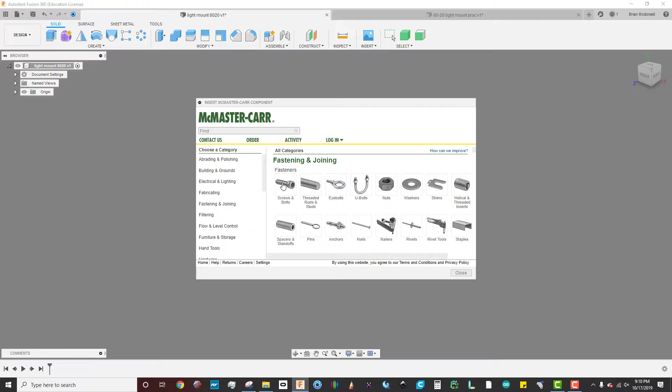Hey makers, welcome back. I just wanted to put together a quick tutorial about a light mount that I created for my 3D printer.

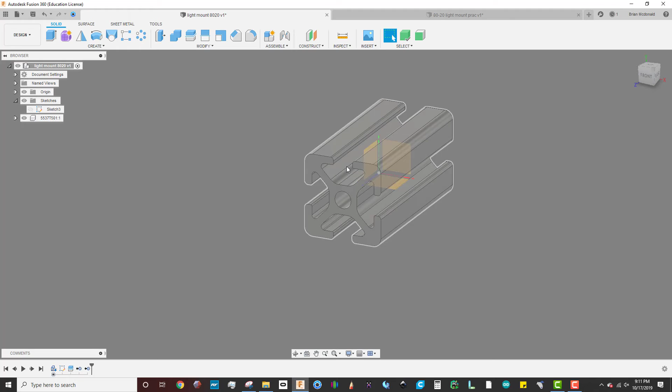So this is the modeling process I want to take you through. Right now I'm just cutting away material that I don't need. I grabbed this 80/20 rail from McMaster-Carr. It's a 20mm rail. It's what I measured from all the 3D printer rails that I have.

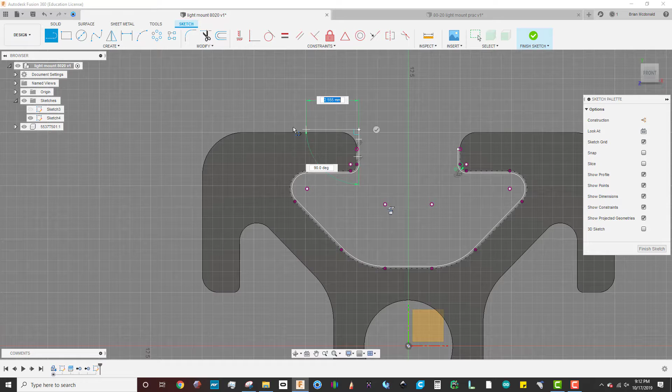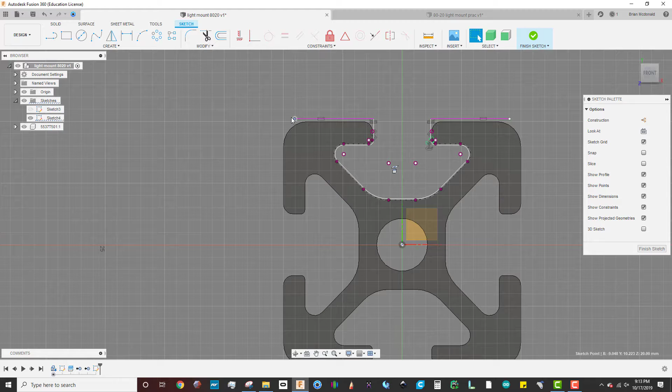So at the moment you see me copying the profile of the 80/20 extrusion just to get a starting point for the sketch. The idea here is that I'm going to create a positive extrusion to slide into this 80/20 rail that's going to serve as the connector for the actual light mount itself.

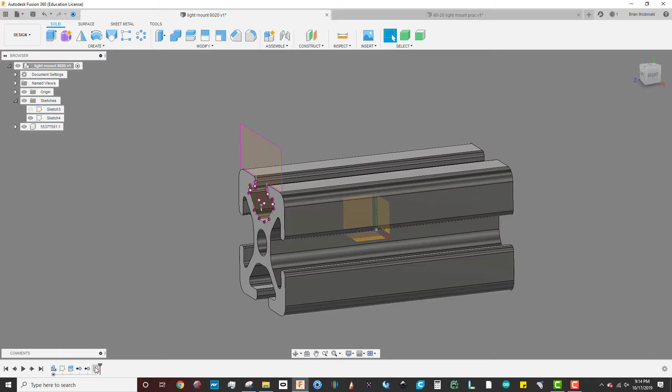And now that I have a closed sketch, I can add some dimensions just to get a starting point. Kind of change that plane so I can do a midpoint extrusion, keep things symmetrical.

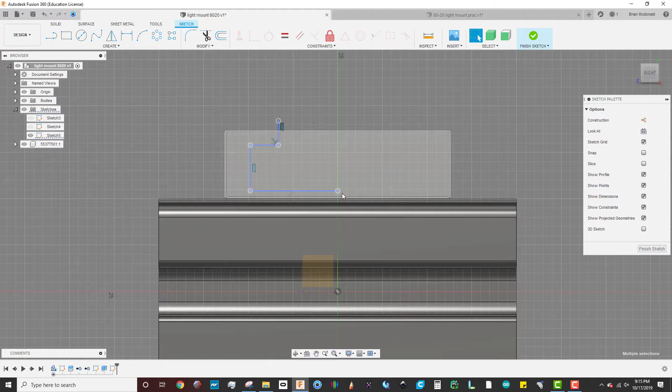So right now this is the sketch to cut out the slot to mount the actual light. And again, trying to work with symmetry. It's always easier to do things once and have them copied for you. So just throwing on some quick dimensions.

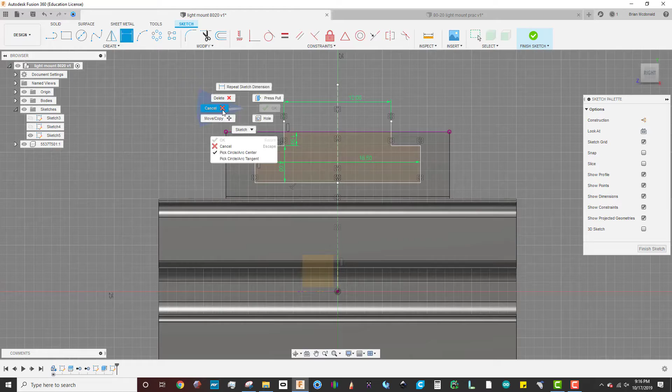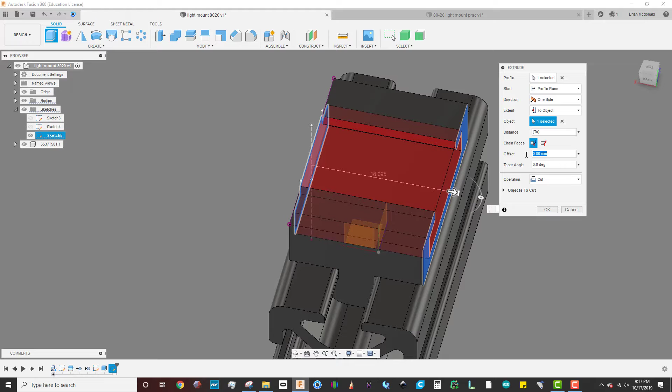So I don't want that extrusion to cut all the way through. I want a back wall to help support the mount that's on the end of the light. So that's the basic shape of the slot.

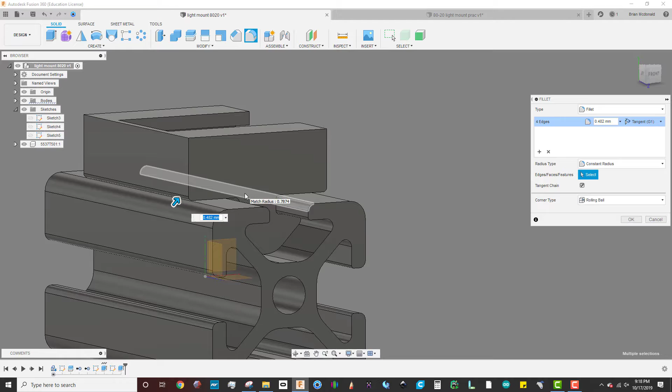Now I'm adding fillets both for aesthetic reasons and structural. Fillets add material. The more material I have, the stronger the part's going to be. The light doesn't weigh very much, but this part is very small, and it's made of PLA, which tends to be brittle. Later on, I may print in PETG, but for now, PLA will do.

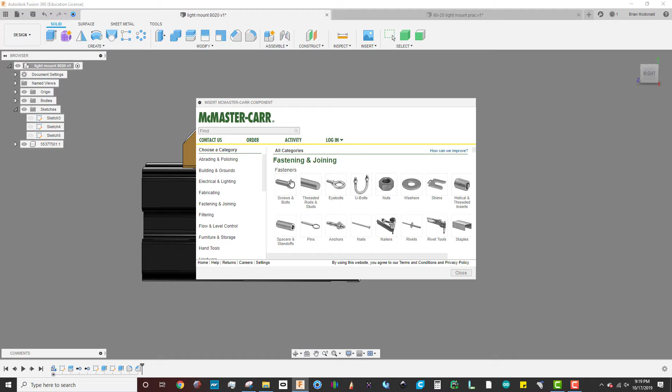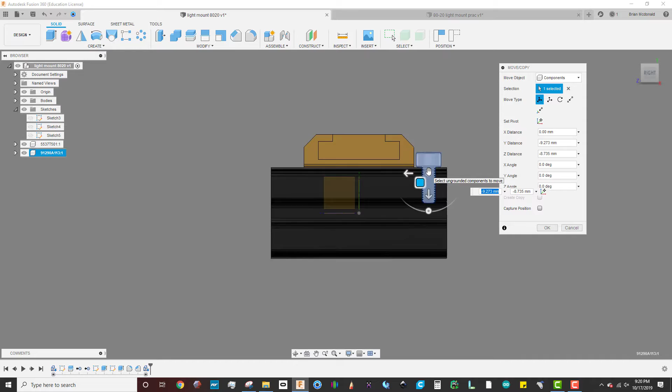So I'm going back out to McMaster-Carr to grab a metric screw. This connection that McMaster has with Fusion 360 is nice. Just go grab models and import them in directly. So I'm just positioning the fastener.

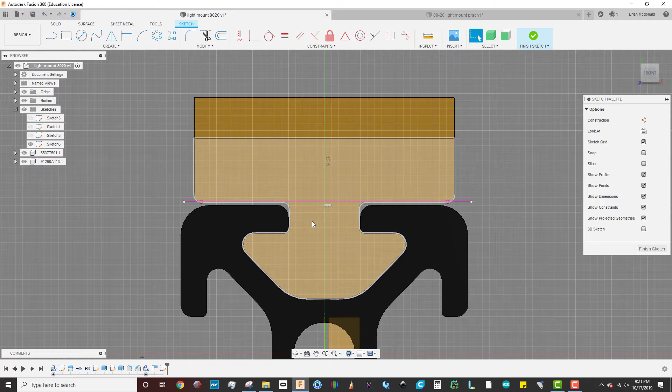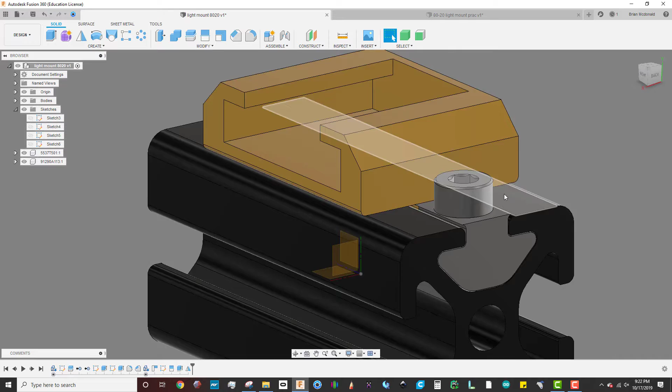So what I'm doing here is splitting the part so that I can extend just that body. That would be the body that supports the fastener. So just use that fastener to cut a hole in that body. Just do a quick subtraction, cut, keep.

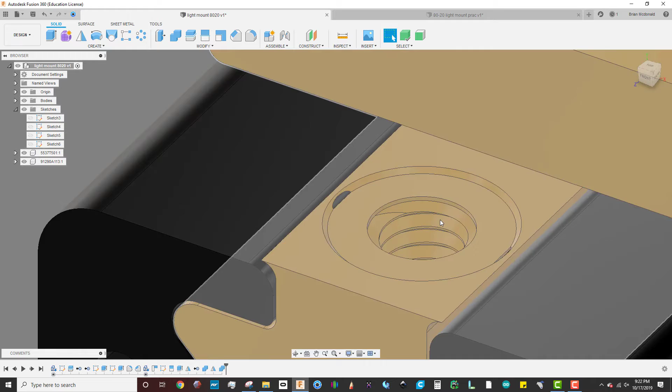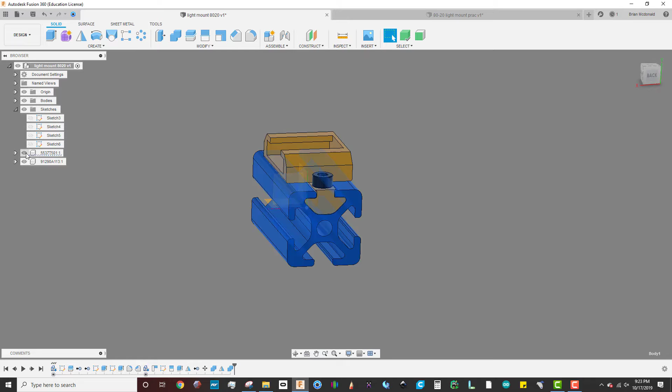Then I mirrored the body and I noticed I had this tiny hole there. So I'll just go back in time a little bit. Adjust the height of the fastener. And there we go. That's the finished product. Make a few final adjustments to the chamfers.

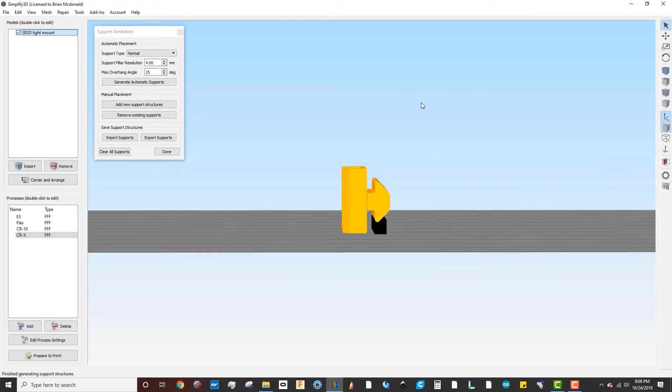So let's jump into Simplify 3D real quick. So we'll drop in our STL file and we'll place it appropriately. In that orientation, you should have strength exactly where I want it, to make sure we have a nice strong joint between the slot and the part that goes into the 80/20. So right now I'm adding manual supports because Simplify 3D for some reason doesn't think that area needs supports. I disagree.

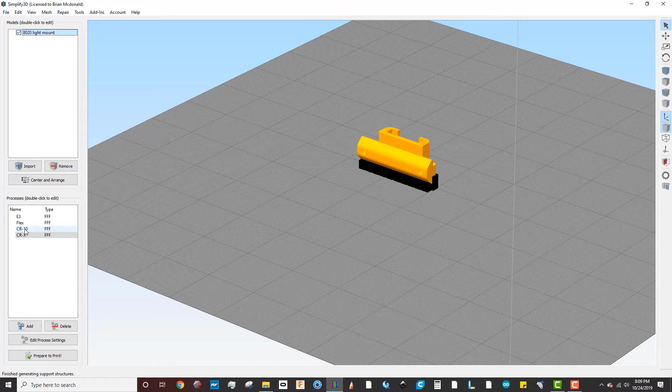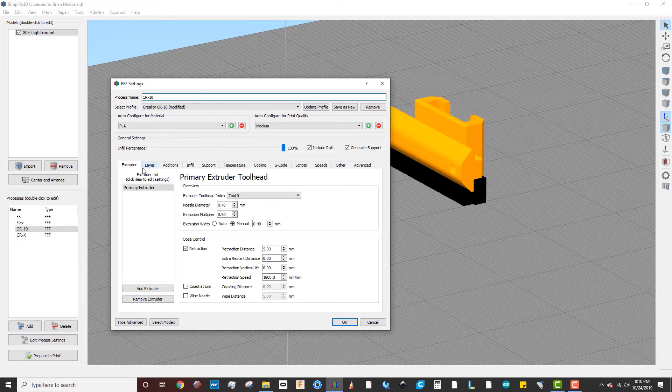So just going through and clicking through the surfaces I need to have support. And I'm doing this because this area needs to be rather precise. There's not a lot of room inside of the 80/20 slot.

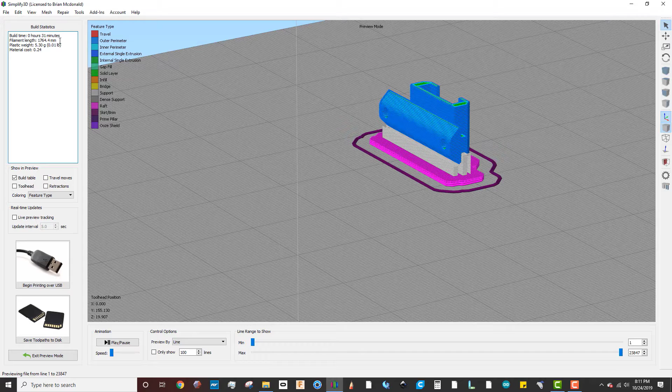What's nice about my CR10 is I have it plugged into my computer directly, so I can control it from the desktop. So right here, all I'm doing is heating up the bed and the nozzle. I'll go over to the printer just to have a visual check to make sure things are heating up, and they are.

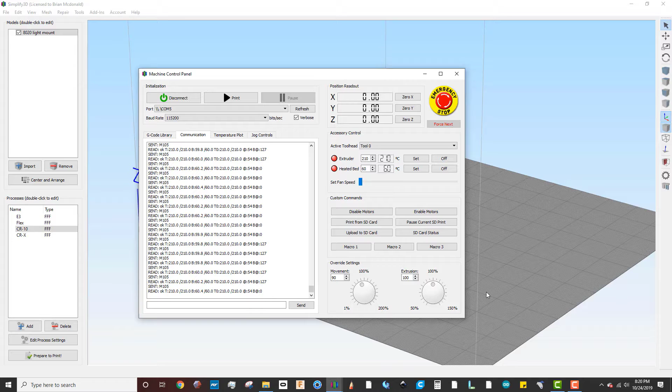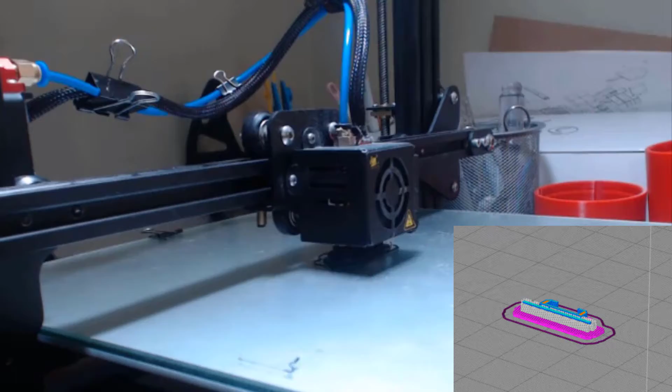So it looks like things are heated up nice and warm. Should be ready to go here. Going to go ahead and start the print. And we'll just watch it go. Looks like we're just about done here. Took about 1 hour.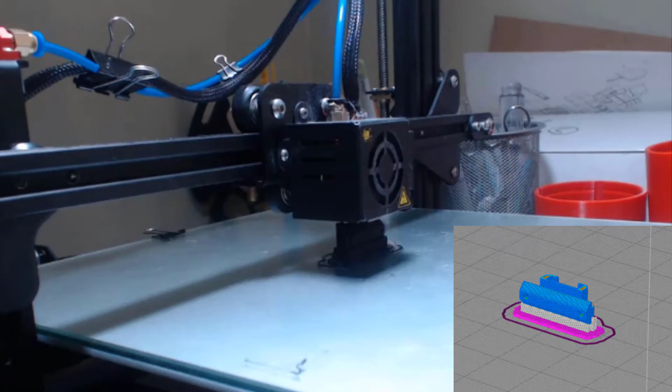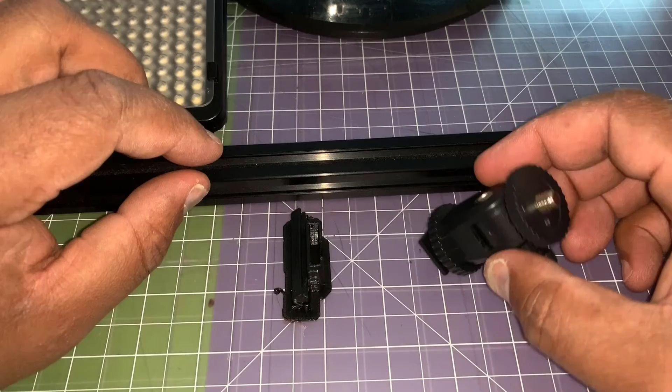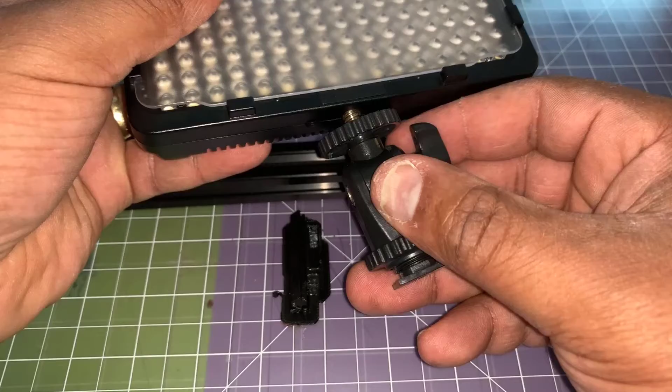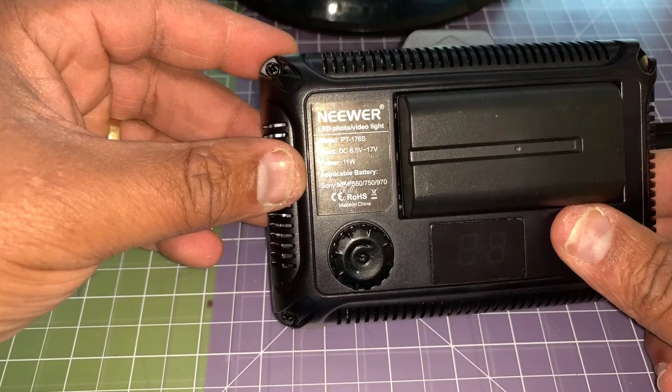Okay, so the whole idea behind this print was to create a mount for the 80/20 rail. This connector that came with my Neewer light mounts right here, and the other end will mount to a tripod. Once again, this is the Neewer LED photo video light. You can get these from Amazon. They're pretty inexpensive.

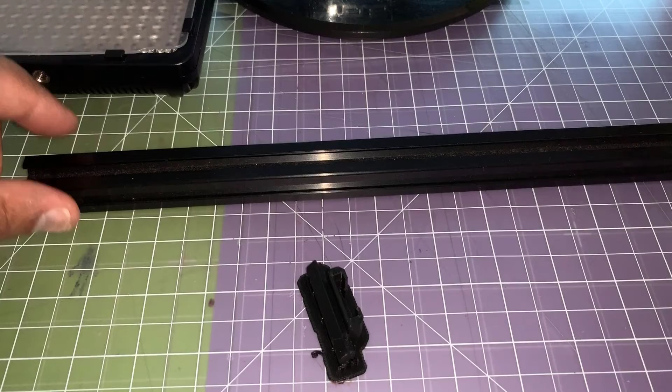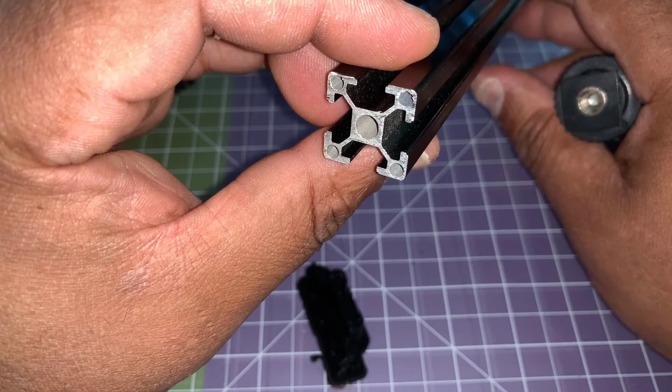But the idea here is that I wanted to put this on my 3D printer, and all of my 3D printers are constructed of this 80/20 extrusion. That comes through clearly, but there's the profile that's just extruded for X amount of length. So I wanted to adapt this to fit onto here. So I modeled something approximate, and I'm going to attempt to fit it on.

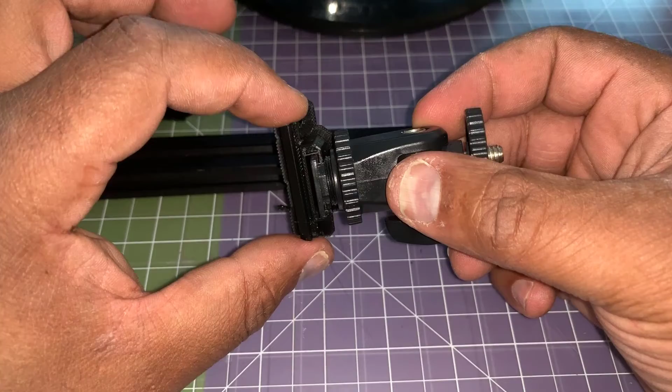So you can see I haven't even peeled off the support material. I'm just testing the fit of this slot, and it seems to fit just fine. It's pretty snug. Probably don't even have to... yank it on it pretty hard there. It won't come off. But just for added security, this will tighten down on top of it.

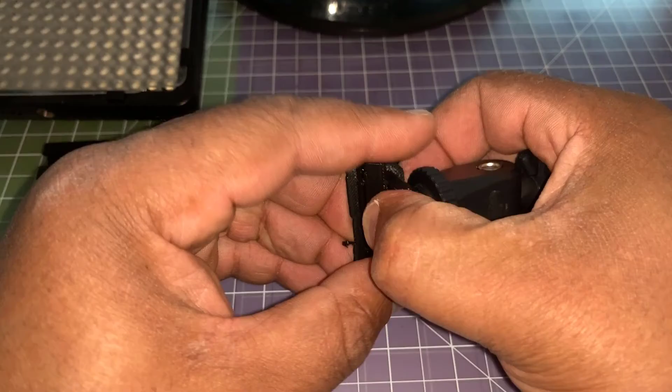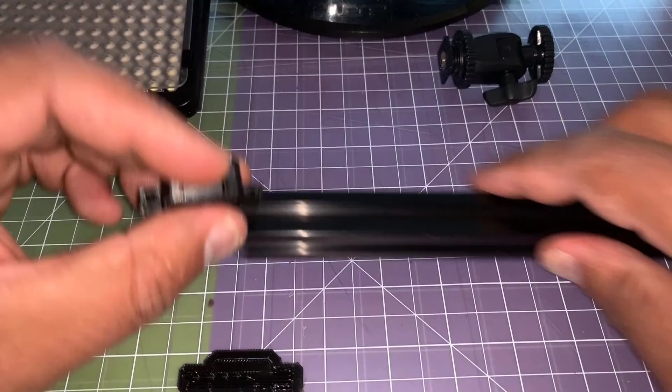So let's peel off the support material and see if this will fit on the 80/20. So as you can see, there's the end profile that we modeled. And what's really important is the slots in between here. So let's attempt to slide it on. Try to remain in frame here. All right, it's giving me some trouble.

So it fits, but it's pretty snug, and I'm not going to be able to slide it exactly where I want it to go. So what I'm going to do is hit it with the Dremel and see what we get.

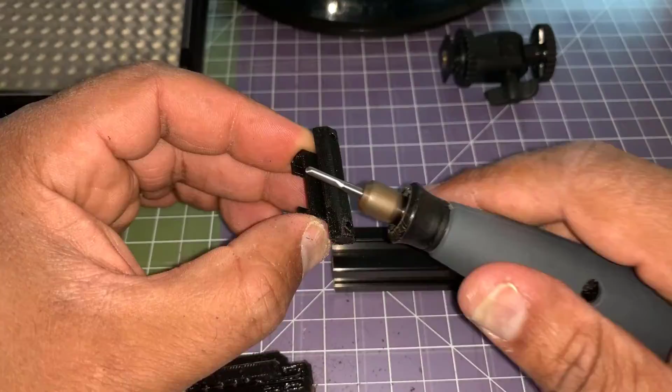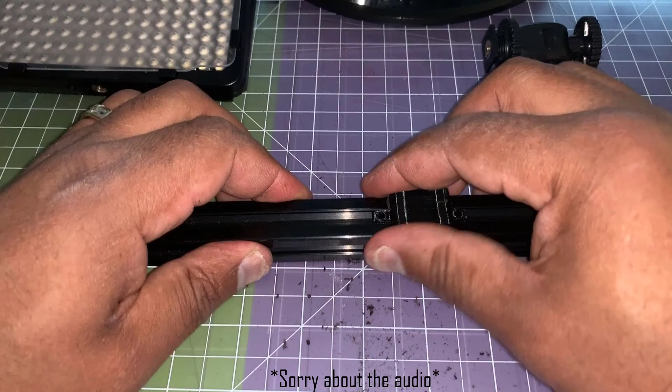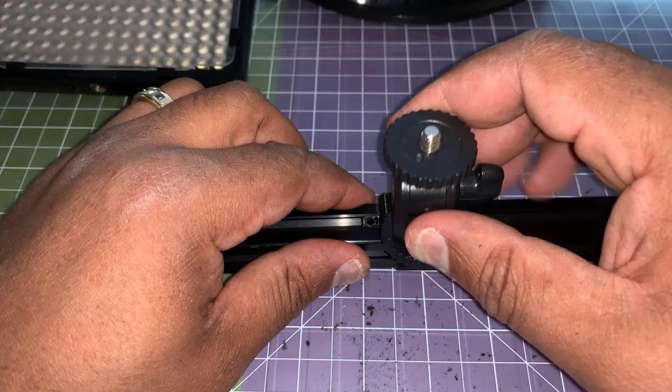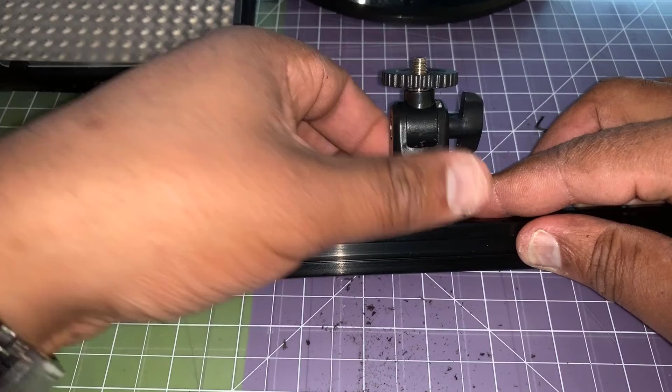So looks like just a little bit of trimming with the Dremel did it. Now I can slide this anywhere I want on the 80/20 and mount my light. See how the connector fits. Yeah, fits great. Looks good.

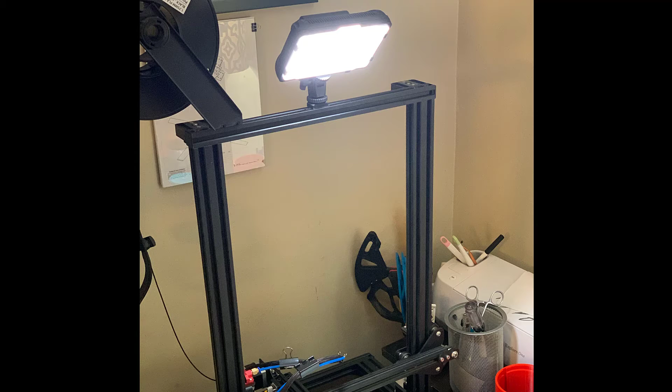I think that'll work. That's it. Got a functioning light mount. Quick, easy model. Yeah. Quick, easy print.

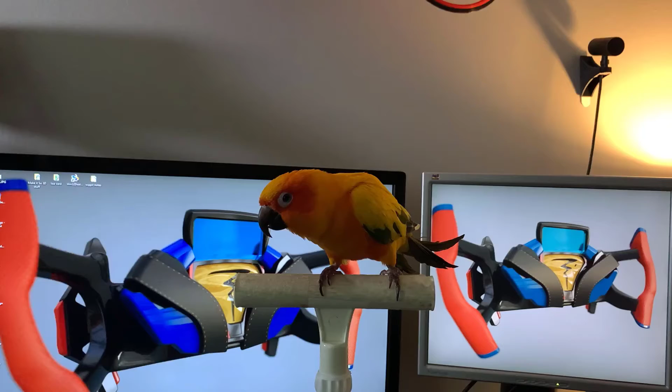Hey. Oh, good. He left the room.